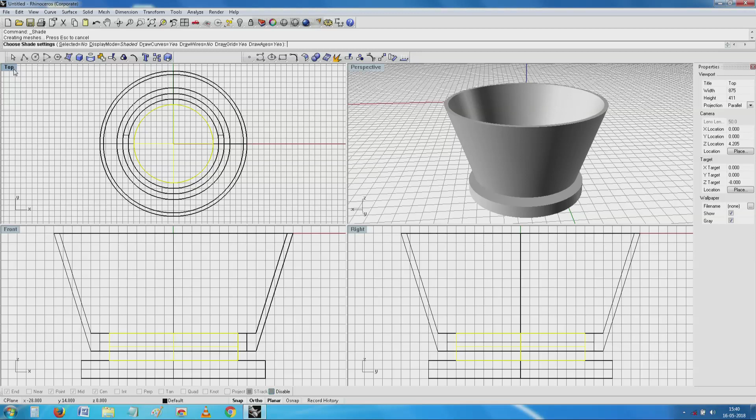Now having this, we come to the other equally important thing. If you see this 18650 cell, typically it has 65 mm height and diameter around 18 mm. So I need to make a cell and see how well I can keep the cell here. I will have a go at making the cells to see how good I am still at making this. I don't have the internet. So, this is 12 mm, this is 16 mm.

Oh, let me take something arbitrarily. So I have a, oh, it is looking ridiculously big. Let me assume, since I have not taken too much, and then I will try to now extrude it and see what best of a planar curve extrude.

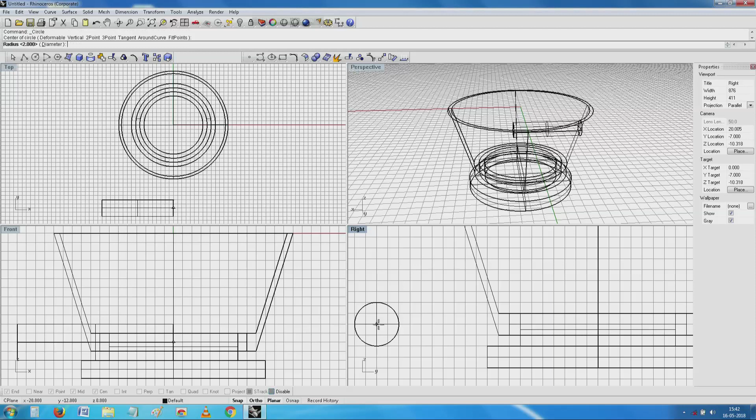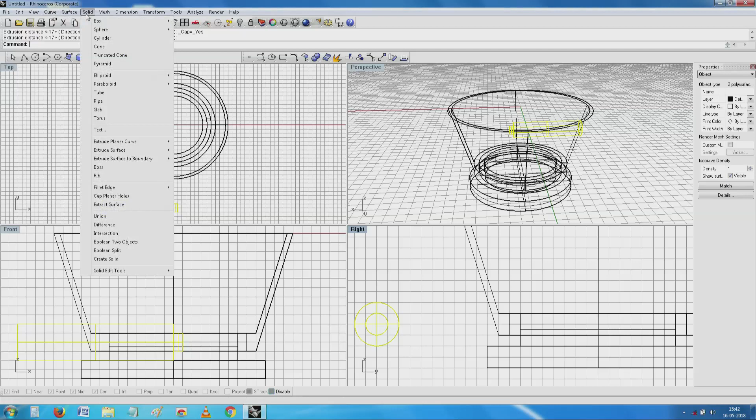See, this could be one of my cells. Now I try my best to play around and arrange it, and just for little embellishing, which I require to identify the thing also, I need a small cap here. This cap makes this at least look like a full-fledged cell. See there, I have a cell there.

Now it is for me to play around as much as I would like, have as many cells as I want. Do I make them stand, do I make them flat, and what is a critical thing here? In this case, the student sort of took it saying the form is equally important.

And what that groove is, I am not able to judge right now. I expect it's a stowage for the wire, and maybe he has given a way by which he can probably push something or keep a packet of sugar and tea bags.

So, we have a place there for storing sugar and tea bags, and we also have a USB thing outside, that is actually an optional thing. So he has made it in 2 rows. So I can in fact take this here.

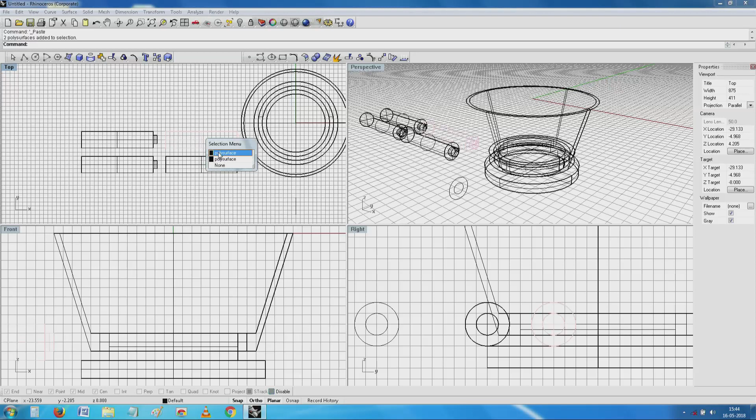I have 3 on one side, and probably there was a printed circuit board or something, and now I move all these things up to the other side and move this here flush.

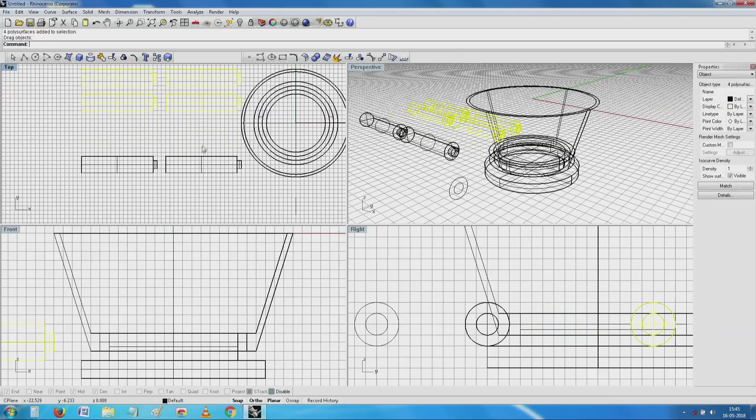So I have enough place here for a power supply and to make it symmetrical. I do not know what actually prompted that boy to make it like this. There may be... I am not able to at the minute tell you what it is.

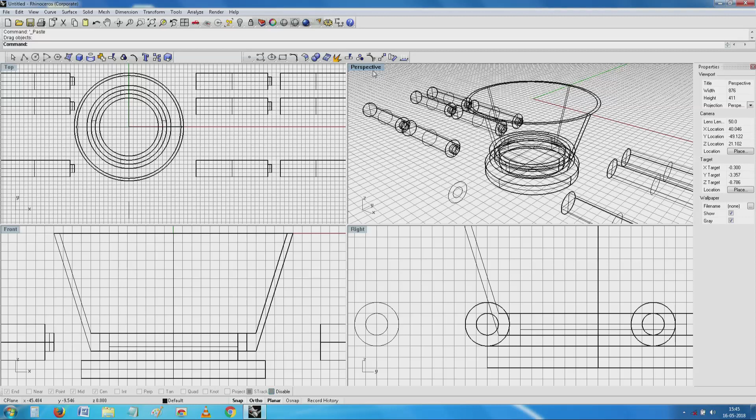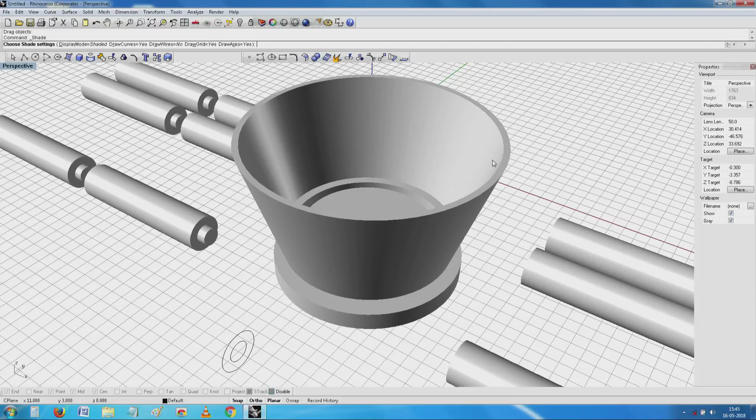So, we have the starting point for our design here. Can you see? I have all the cells in place. Now I need to build the remaining project, make a box all around it, and right now to go a little faster, I will remove the cells completely, meaning I will hide it. We will get back to it in due course when the time comes.

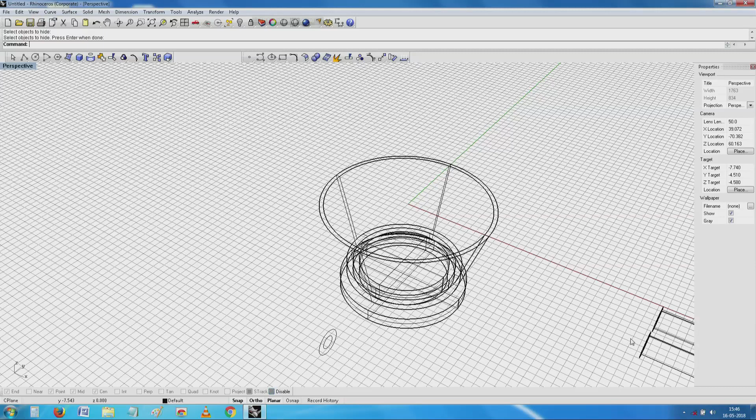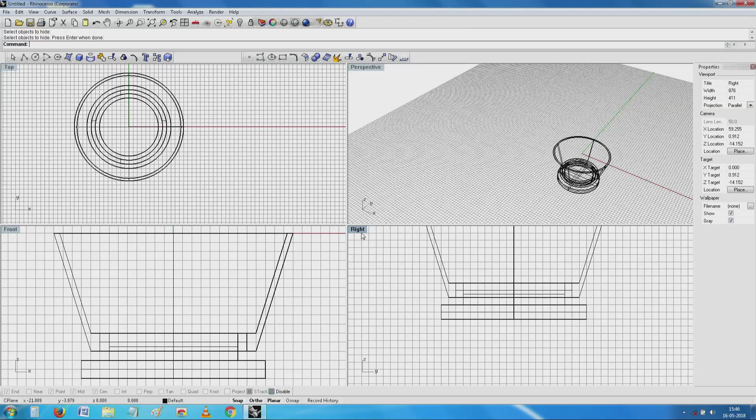We have come back to our cup. Now I will try to go a little faster as I can. Now, from here onwards, this is the side view. If I see this side view, it is easy for me to make a solid, it is actually a box.

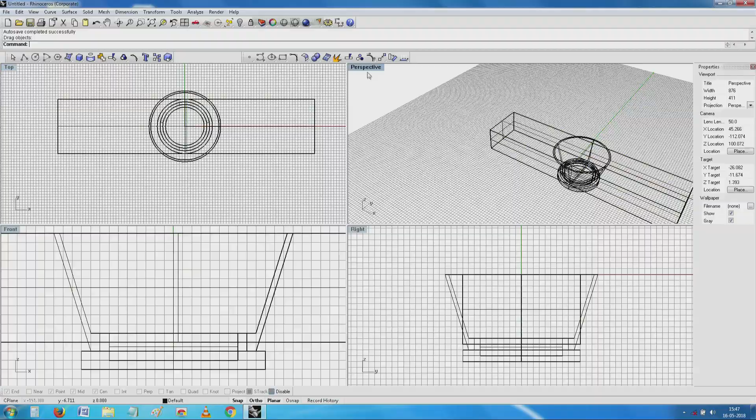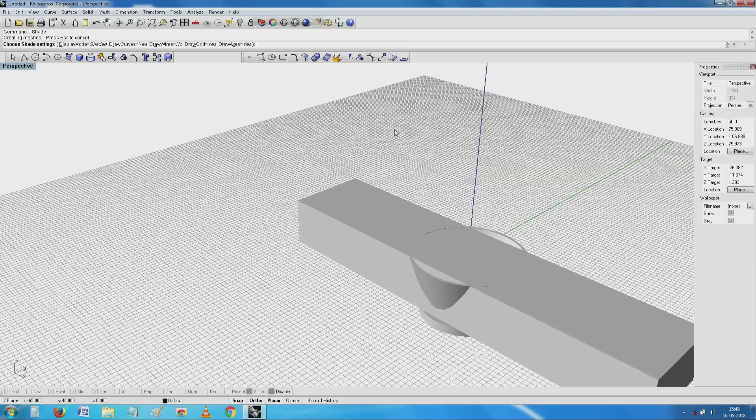The form is emerging slowly. If you see here now, it is for you to decide how you are going to deal with this situation. So he has done a very convenient way saying, obviously all this is looking ugly, why can't I... I am sorry.

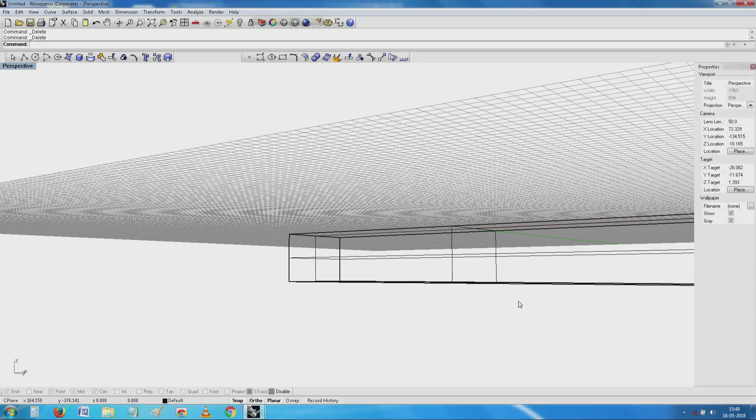Sorry. Why can't I just stick to this basic form?

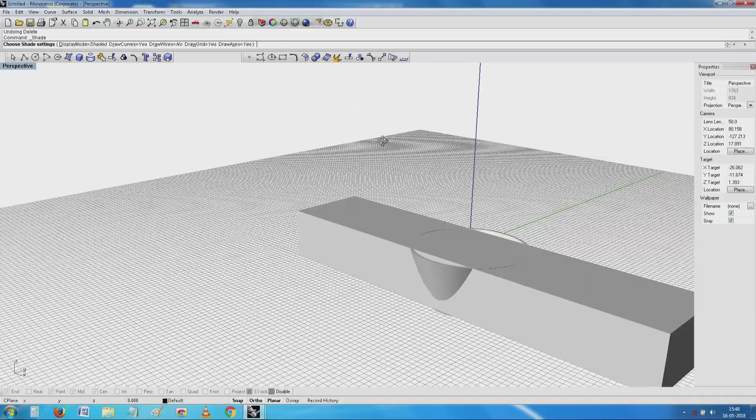That is the basic form which seems to have made sense to him. Right now, I will delete this and make something which is actually very aesthetic, which looks way more aesthetic than what I can imagine. So I make a solid here, which is again a box.

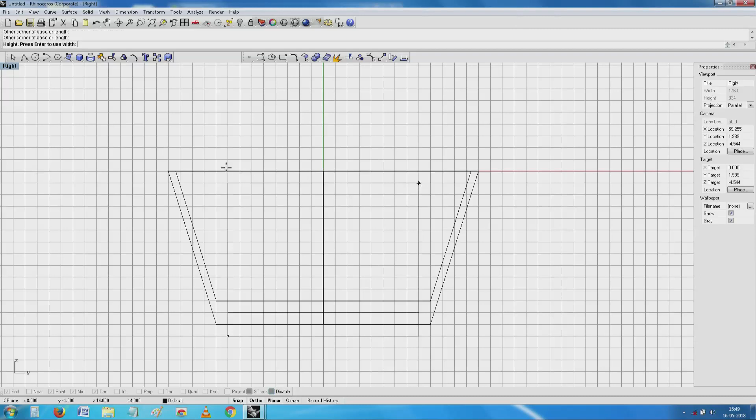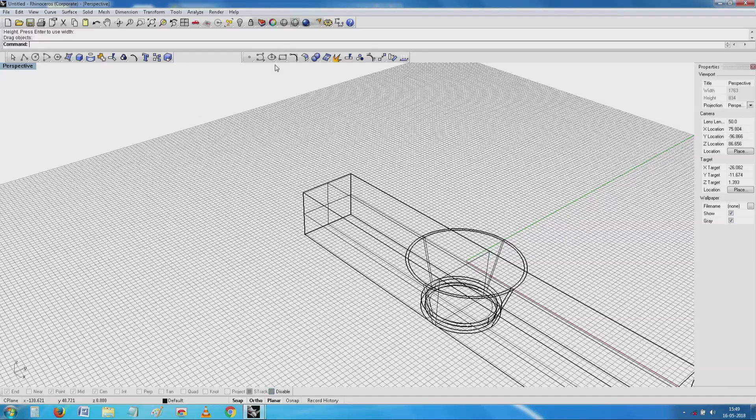I am getting what he could do. The easiest thing for me is to try to cut it and remove the inside surface and all that.

So this is the basic, and then removing - on this box a lot of trouble has been taken. He has sliced the box, made it open into two parts, a top portion and bottom portion, and then the taper itself is a challenge. How do you build this?

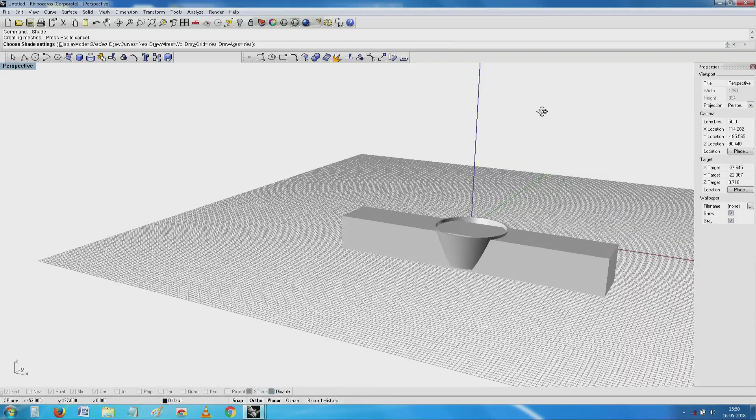See here, it's not impossible to make that nice thing. Right now, to make things a little more simple, I will just do a simple Boolean difference and cut it off later.

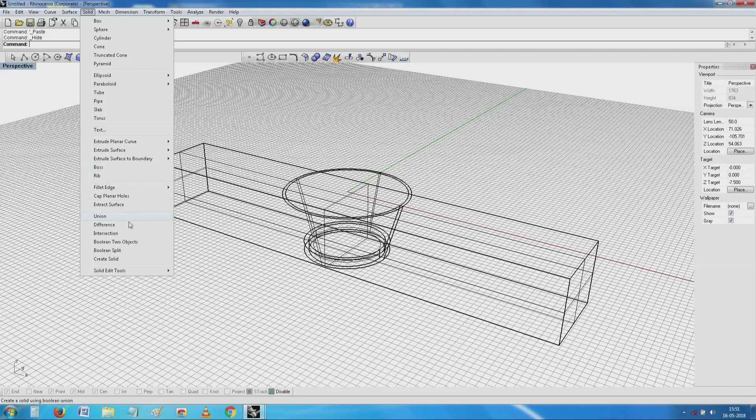One piece is hidden, the other piece is used for the... see there, I have a...

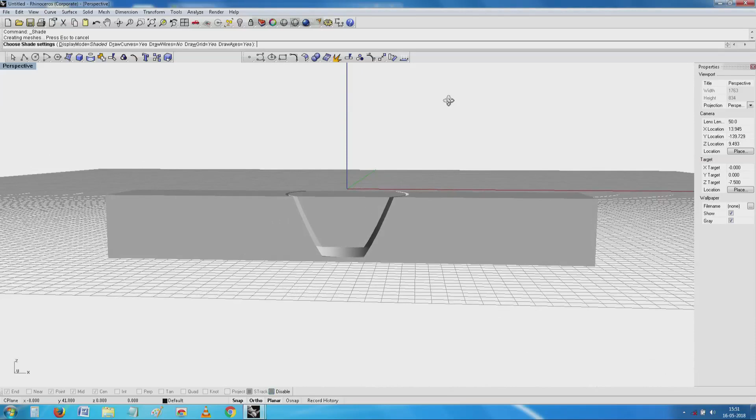What I think is an extremely clever object. I have something there which is cut, and something there which is there and all that. If I want to, it is easy for me - all I need to do is make some arrangement by which this inside surface I can probably explode it.

See, one after the other, I will remove these surfaces.

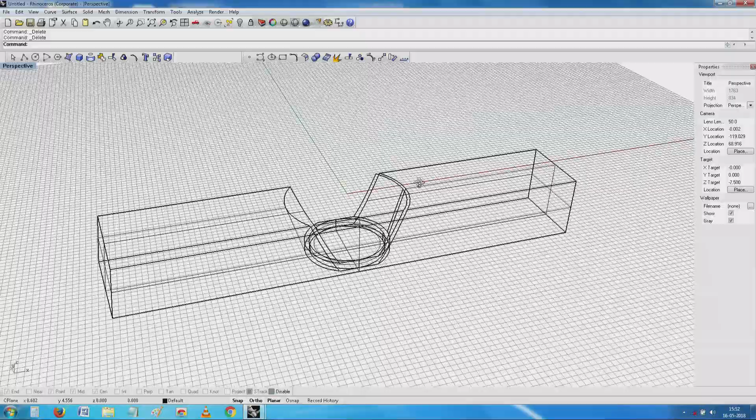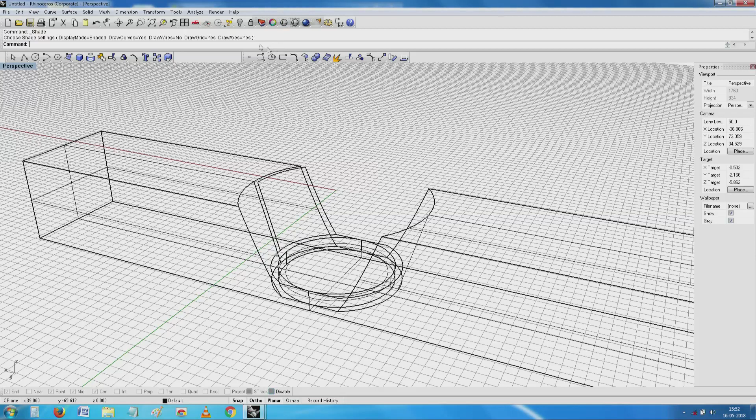This is part of it which I could manage by making the Boolean operation. Now, when I unhide what has been hidden and remove all these cells.

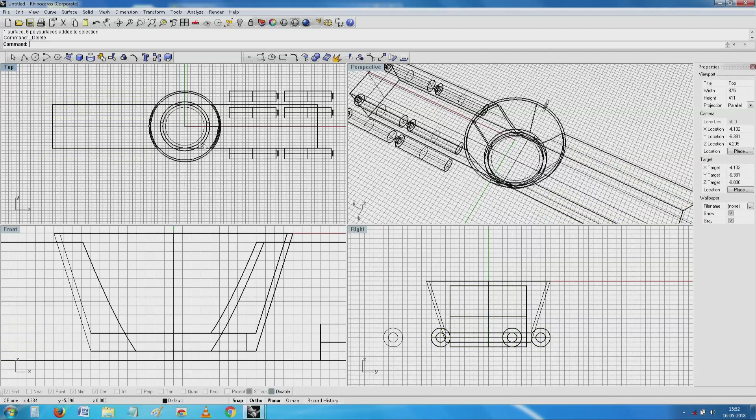My project is almost ready.

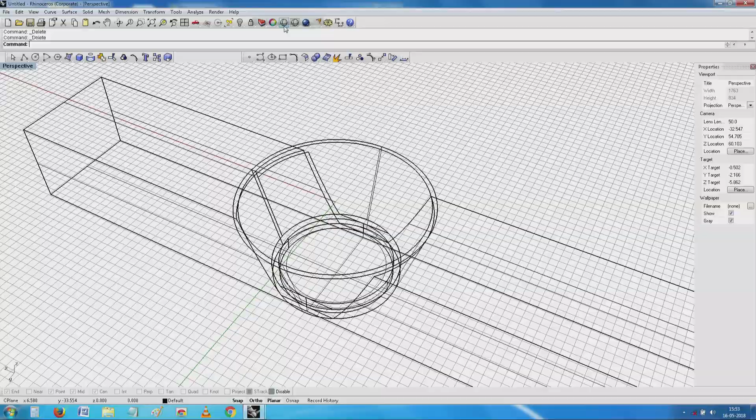See, I have a nice formation of a cup like this, and you can see a little bit of the detail also at the bottom. Then I have a box.

Next you need to decide how to print it. Luckily, in the case of 3D printing, unlike other things, you just need to either print it straight away without the base, or invert it. If you invert it, we end up with that peculiar overhang like this.

So in this case, this helps in building it straight away. Printing it like this, in the same form, is about the easiest thing to do. Now, inside, the whole thing is a solid.

Now I go around and try to see how best I can make use of all the surfaces which I have used earlier - how best to hollow out all the material inside.

I can make something which sits comfortably, and if I turn it over - okay, you have seen this here.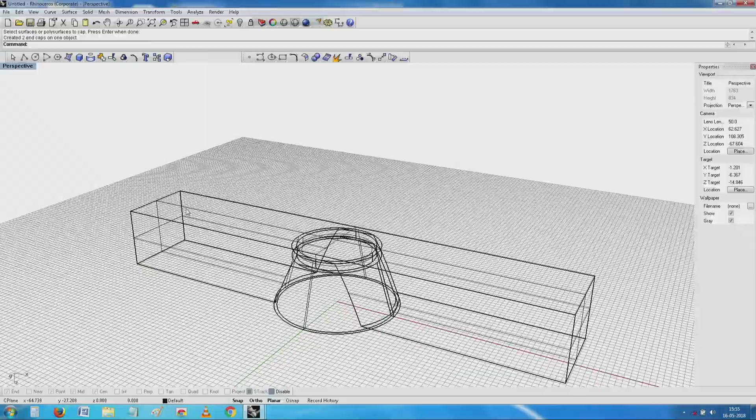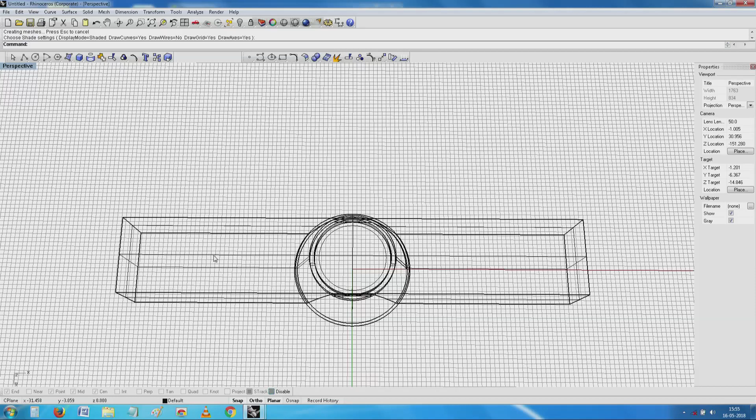I have what looks, at least at the first level, a beautiful object like this. Now it is relatively easy for me to use this bottom surface and try to cut through that material and remove as much material as possible. But what makes a little problem for me is this cup-like structure here.

Now I need to find out a way to create that hollow surface in a possible way. This is where building the model becomes a little tricky, as well as - I mean, that is how it is.

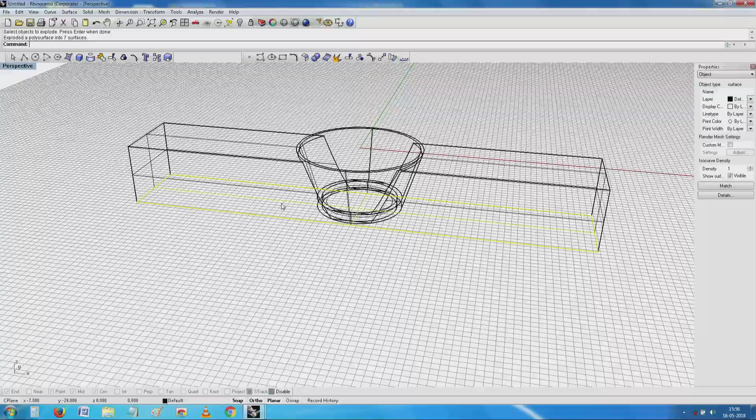Just to show you what can be done, I will try once again, as I have done before, to remove the bottom surface. You see here, this is the object.

See, it has come so far. Now, I need to do something to make sure that these surfaces, I convert these things into surfaces and attach them and join them. The moment I join them, I have something which can be printed easily, and chances are there will not be any surprises and problems, and you see here it looks reasonably good.

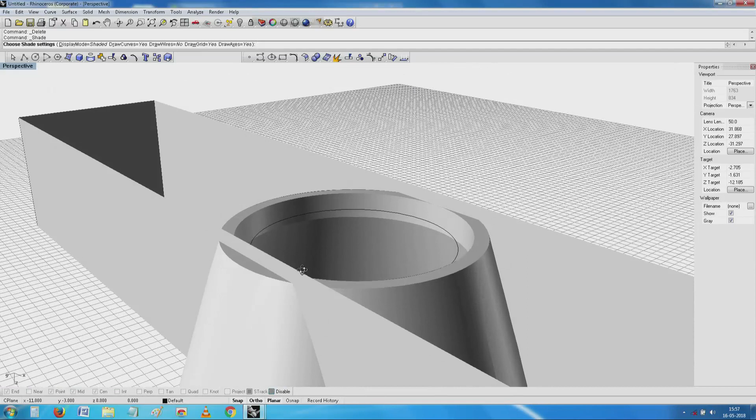Only thing is, now I need to worry about thickness here. You see here, this thickness has come here into this corner. Now, if I go off there, it will intrude into this surface and create a problem for me. So, I use all my ingenuity to see what best I can do to prevent it, to see if there is a thickness, if there is enough material, what to do. So, I will now have a go at it, and just be patient with me.

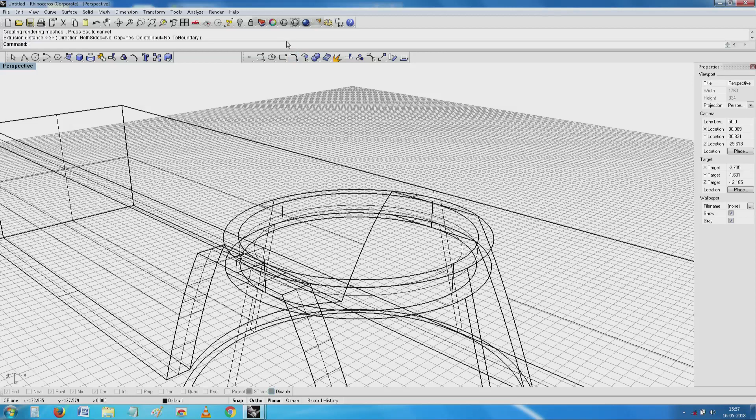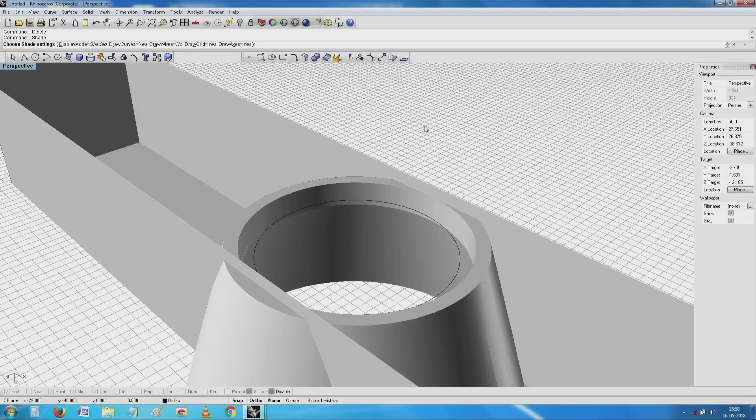I make a solid out of this surface what I have here. Anything has happened? See, something else has happened. This is probably not what I wanted. Seen this, no? It has gone off into the other direction, and it has extruded here. I still have the old surface which is there. Now, I will try to go inside on the other direction.

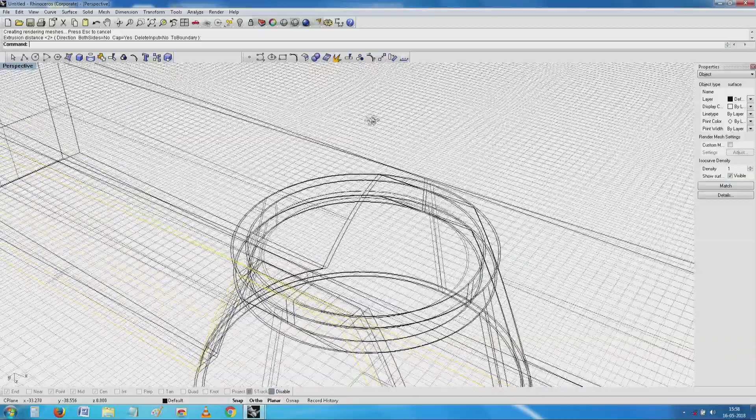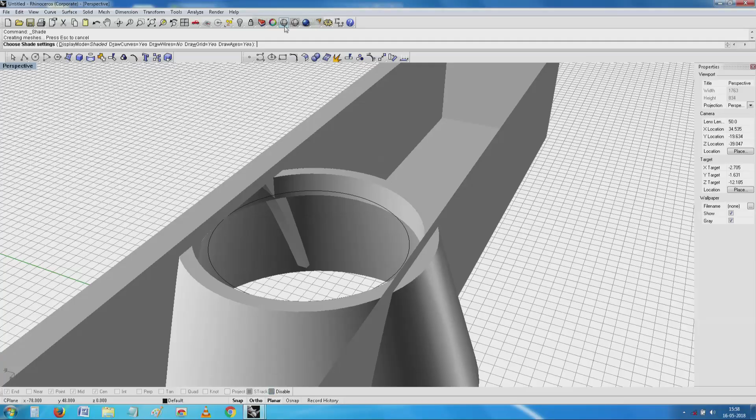Am I better off? Maybe, maybe not. See here, not so much of a damage. It is not bad enough, at least I have come this far. It is easy for me to remove that material. Can you see here? I have something here which has extruded. That is easy for me. I can take this cone again, make another cone, and easily remove that material.

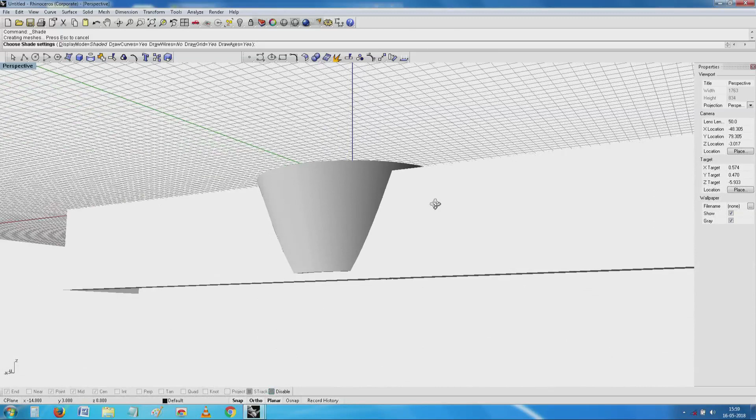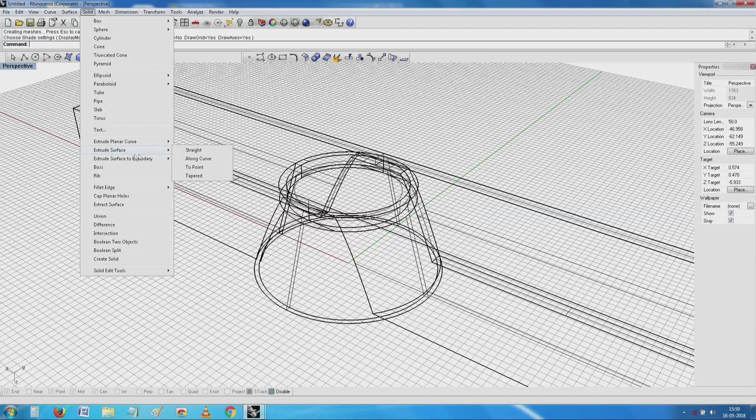But in principle, the outside sits flush. It is not as good as what my student managed, but I have got something here which is not bad. I will say not bad is all I can say. Now, I will try the same thing for all the other surfaces, see how well I am doing, and then get back to the whole thing, and then try again, now I extrude this surface straight.

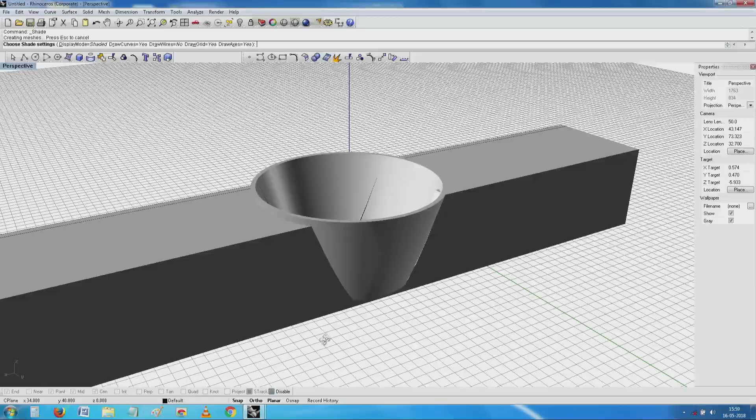This is slightly better. The thickness did create a problem here, thickness is not so much of a problem. So, maybe I should do it there also. You understand? Maybe I should do it there. And incidentally, you have seen one more thing which I have managed.

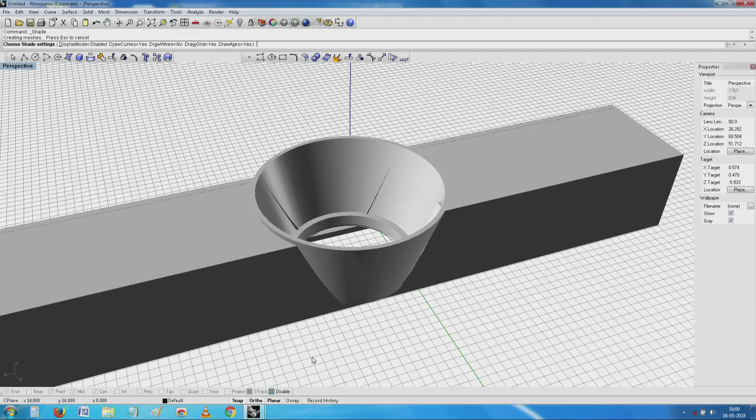To prevent that thing from getting jammed, I may have small flutes all around. These flutes have an advantage to make sure that they do not jam the other thing. Disadvantage being it will prevent contact. So, not a very good idea to have these flutes. So, I need to now do something and trim them off. It is very easy to trim them off, I will show you later. However, to me this seems to be a much better option than this.

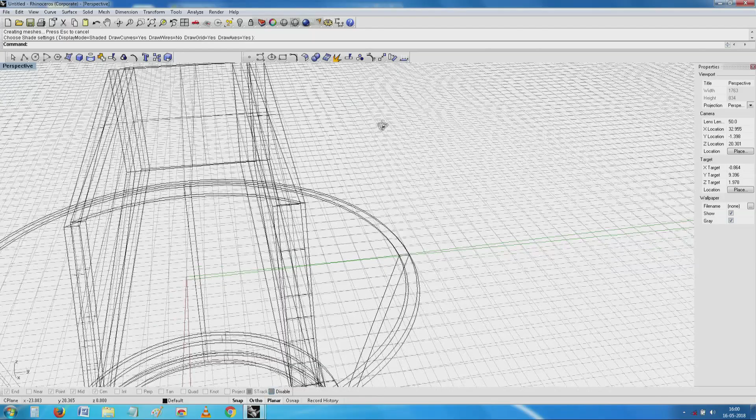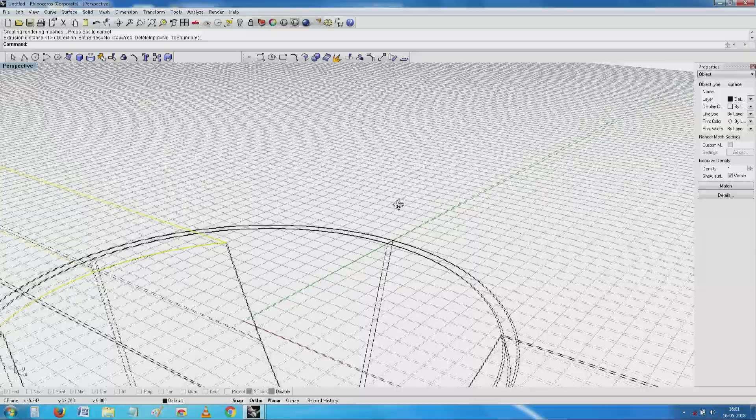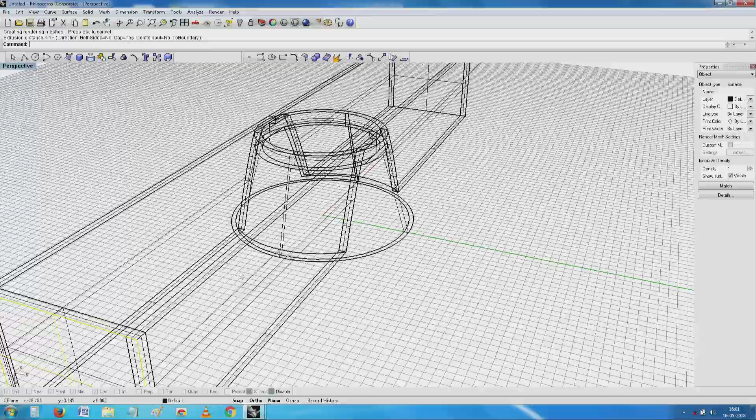So, I will remove this polysurface, use this surface again for... see here, this is slightly better. Same thing I will do with this surface also. And with this surface, last surface which needs displaying.

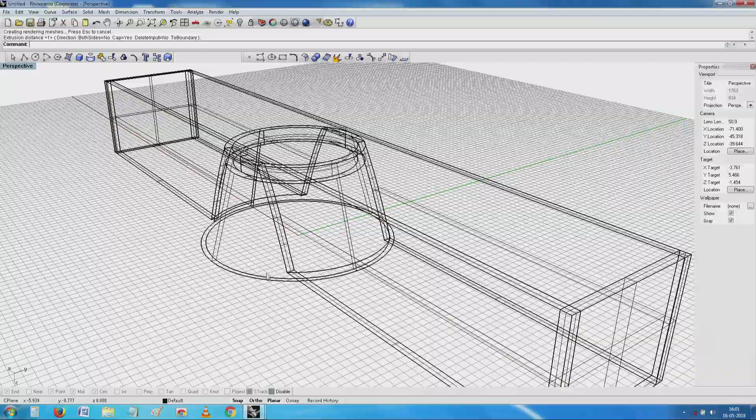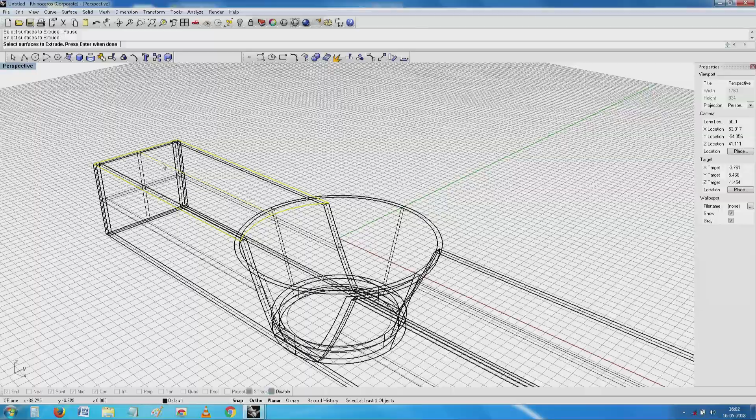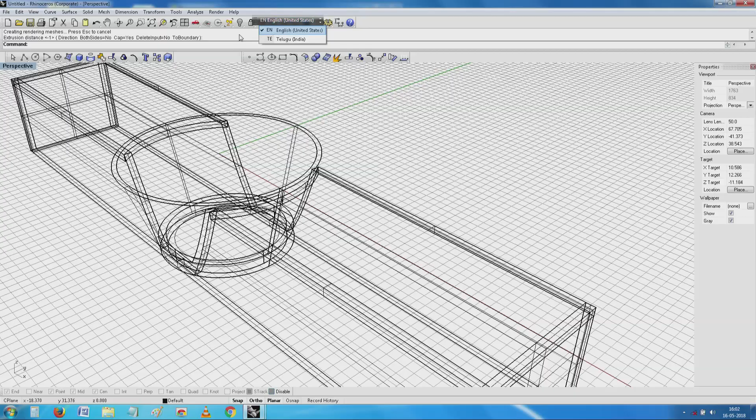And I have got these two bottom surfaces which I have left earlier. My project is almost ready now. See, I have a cup and it is hollow, and I have placed now to maybe put a printed circuit on the other side, and printing this is relatively easy.

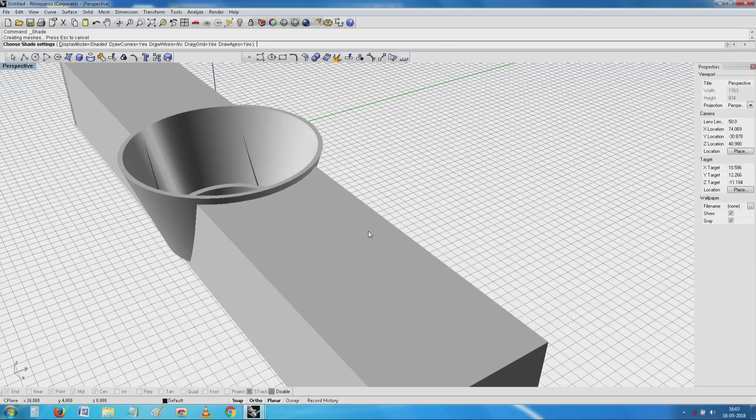Now comes the important thing saying, but sir, we have a little problem, what do we do about this thing? Now, if you are to print like this, while we have solved the problem here, a large amount of support material is required. So, you need to make a trade-off, saying, would you like to print it this way or would you like to print it upside down this way? If you print it this way, support material ends up in the cup, but this prints easily. Now, if you print it the other way, that also prints.

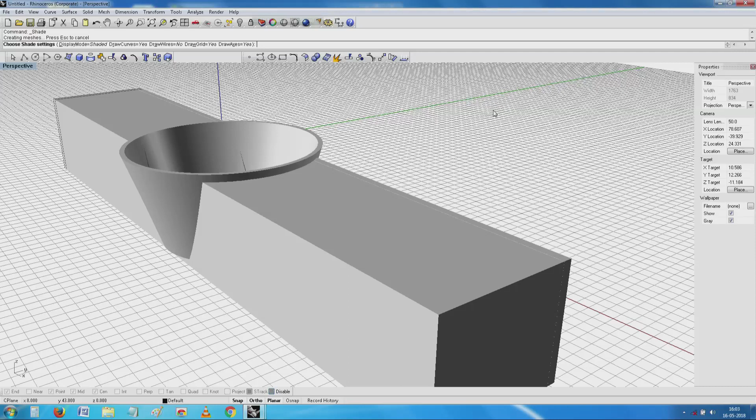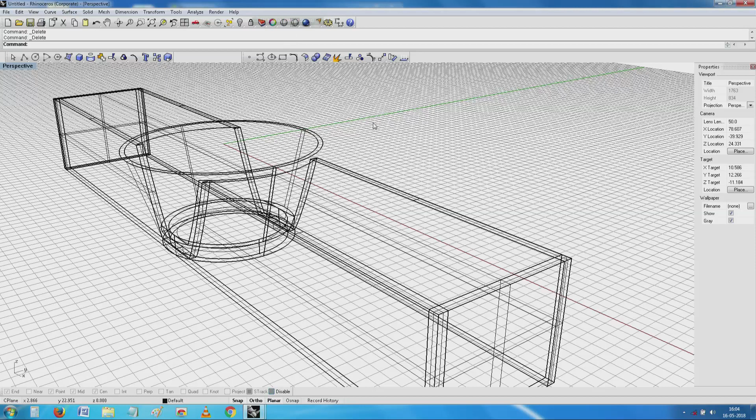So, is there any other way out? Obviously, there is a very simple way out. There is no particular reason why this top surface should be built and it should look like this, is it not? So, instead I will remove the top surface and try to build it from the other side. See how.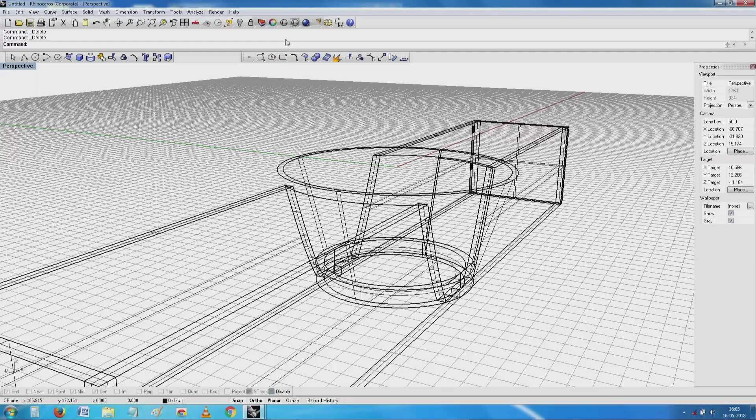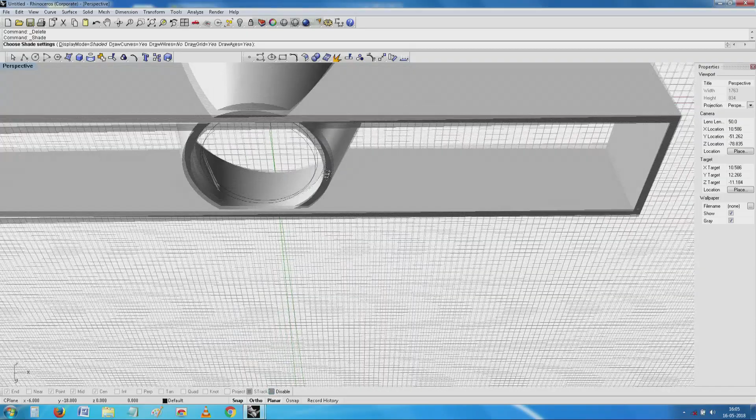See this here, I build from the bottom surface instead, and this angle, being not too much of a problem, it is very easy for us to build from this surface, no problem at all. You understand, no? Or I can build it from here.

So, either way, the total amount of material that is required and how it is, I need to play around with it a little. So, generally this particular decision you can take once you load this onto the machine there, saying building it this way, will it make sense, or building it upside down, will it make sense, this being an inclined plane. So, where does the support material come?

So, in my experience, it is probably easier if you build it upside down like this. You understand, no? So, that thing starts building, and one after the other there is enough support material to build here. Alternatively, if it is more convenient for the machine to build things like this, we can build even this way.

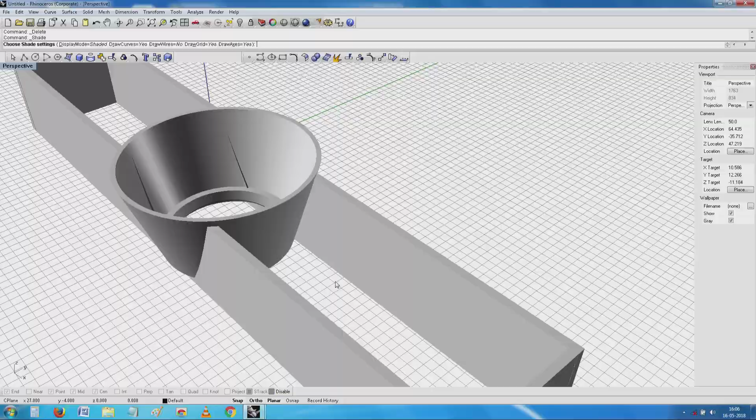So, both the things are perfectly valid, and purely from a matter of convenience and aesthetics and all that, this is probably much easier if we allow it to build like this, because that angle is not more than 45 degrees, there is still a little slope. This is straight 90 or 0 degrees, this is full 45, this only comes to maybe around 30 degrees off from the normal. So, most likely it is easy to build without too much of a problem.

And afterwards, like we have done before, we need to provide the various bosses and all that, and in this case he had made a place for a tea and milk sachet, and probably a spoon. Now, can we build the spoon also into this? Yes and no, depending on the type of plastic you use, probably no. It is much better to take a wooden or any throwaway spoon and use it for stirring, or in the case of purists, they just put a tea bag, steep, maybe shake it, throw it away and start drinking.

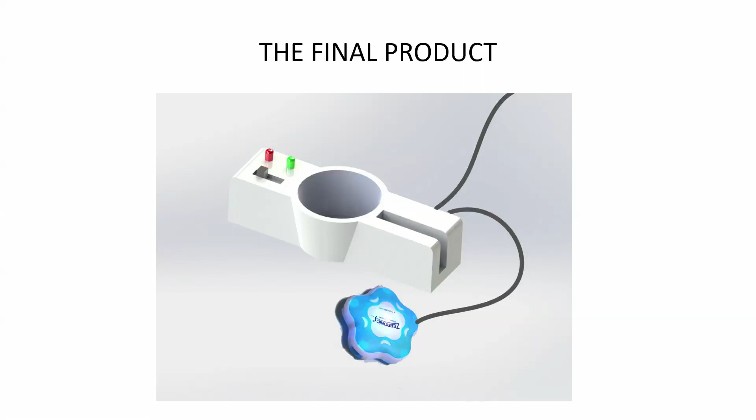So, this is the story of my USB, I will call it teacup or whatever it is. So, there are various slides, various control is possible, how it sits, how do you attach, and how do you build this product, what is the angle, and if it is not very deep, mine looked unnecessarily deep, it is very much possible for us to build this product.

So, thank you. Next session I will probably show you something else, which is this. If you remember, I started with a light. So, next session talks about a relatively easy thing to build. In this case, it is built out of two shells, one shell on each side, but the real life what we build does have a texture. This texture problem here, can you see? This texture does give a problem here.

This is the CAD model, this is the 3D printed model. So, it is not impossible to finish it. What can always be done is, you can coat it with any of your paint primers, or there are plastic primers, and use good old manual skill to make it smooth. But the reality is the one on the right side is real, the one on the left side is a CAD model our students have made.

So, automatically you will not get this model here, though now it is readily available. The surface finish is still a problem, but colored materials and smoother materials are possible. And more important, what the students have managed is an LED bar graph. So, I will explain to you the product better.

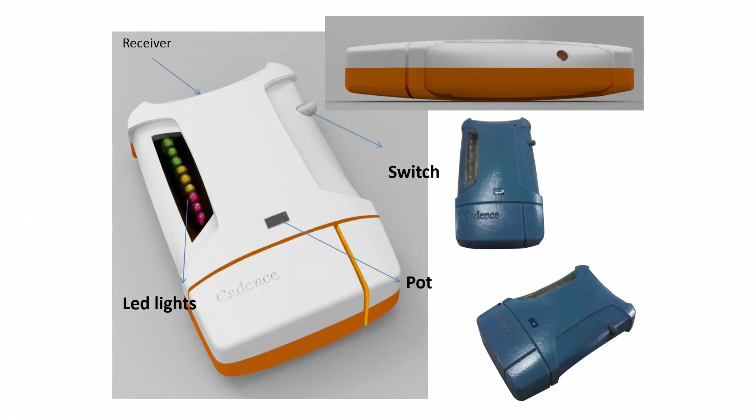So, I will stop here, and maybe in the next session I will show you another sample, and maybe we will try to build it. So, thank you.